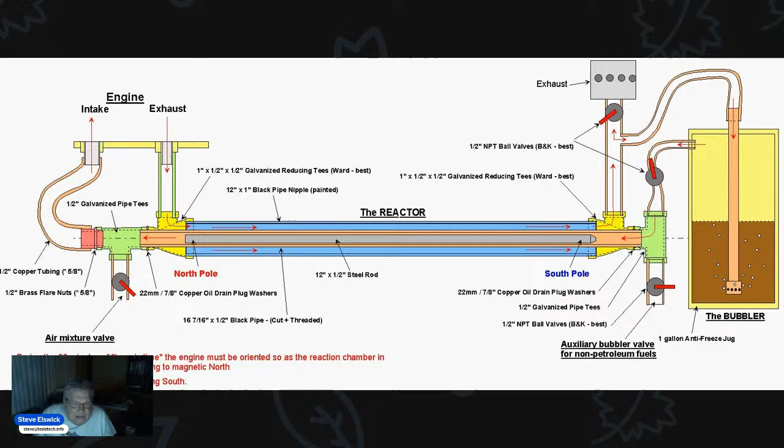Now, with this thought, let's move on to the next engine I want to discuss. This here is a GEET motor, that Paul Pantone invented. His son David is trying to continue the work. I have one of these on a small engine, and I've seen it work.

There's a couple of things to keep in mind. When this thing is running properly, the exhaust, which is on your right looking at the screen, should not get hot when it's working properly. If it's hot, there's something wrong.

When it's working, what happens is the reactor basically has the intake going through the exhaust, and the heat combined with this rod in the middle with the magnetic field turns into a plasma. The heat you see on this should peak somewhere along the axis of the reactor, and that's that blue chamber in the middle of the screen there.

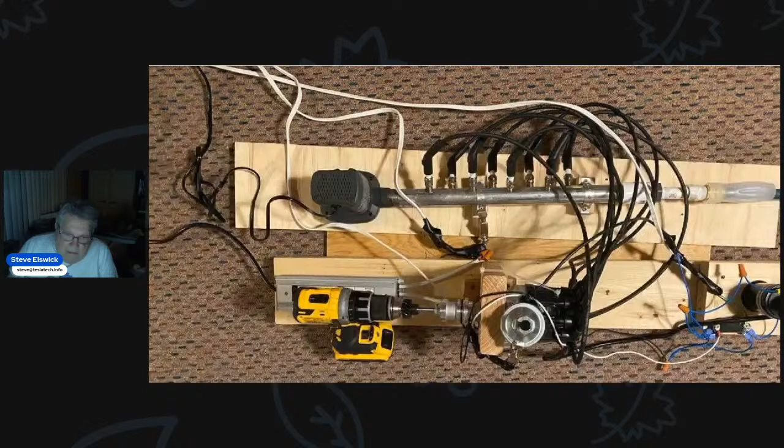A couple months ago, we had Tom Martins come in here, and he had his Martins device. To me, the Martins device was quite unique. Here's what it looks like, the schematic. On the schematic, you can see basically it has a battery charge.

It goes to the ignition coil, and then he has the air intake go through a series of spark plugs, and the air intake then goes out and is mixed with the fuel, with the fuel injection. So what you have is a plasma mixing with fuel and then getting burned. Pretty incredible stuff happening here.

I was struck by the similarities to the GEET device. The GEET device has the bubbler taking and mixing the fuel with the air, that goes into the intake, and so it has like a plasma being created out of the air-fuel mixture.

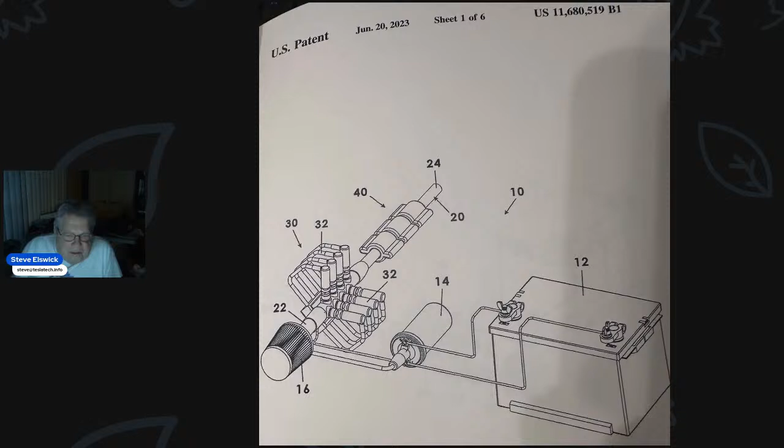And with the Martins device, it doesn't need that. It takes and turns the air into a plasma, and then when it mixes with the fuel, it could turn around and make the air-fuel mixture a plasma in itself. So it really simplifies the GEET device, I believe. That's one of the thoughts I've had.

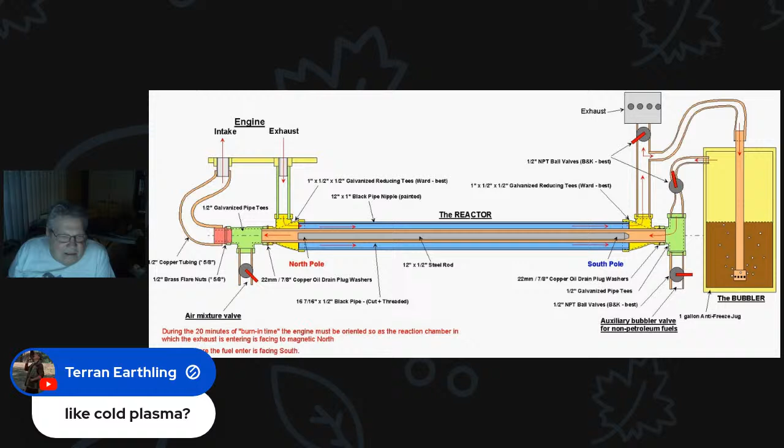I guess you could say, the thing about plasma is that back in the 1900s, they were all thinking that to be a real plasma, it had to be hot gases. This here turns plasma technology on its head.

And because everything's in a vacuum, anyone who works with chemical reactions, or actually any kind of reactions, will find that things react at lower temperatures in vacuums. It's just a fact of life.

So what will happen here is you don't have to have the intense temperatures that they're looking at in these nuclear fusion devices and that.

I'd like to see more research get done on this type of stuff. It looks like all these major companies think they have a handle on anything. So if anyone has a thought on this, this could be a place where you can have a real input in our future.

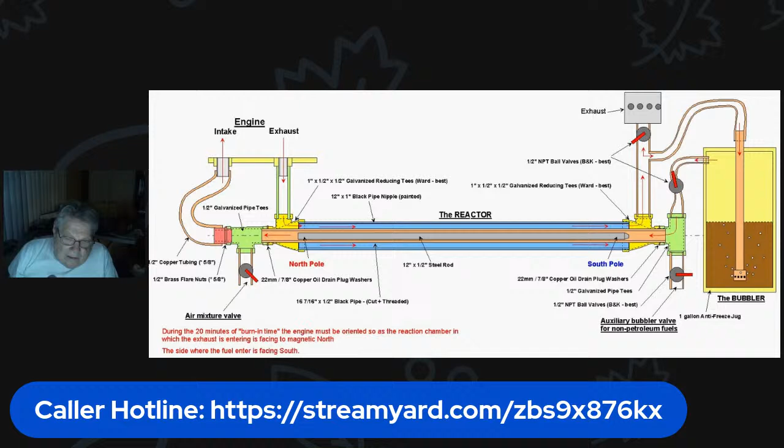And if the GEET is really complicated, I think that Martins' device here, which is patented, but I'm sure he'll be willing to collaborate with people to really build this thing up, is an alternative route to what Paul was trying to do with his GEET device. And the advantage that this device would have over the GEET device is the GEET device has a fuel line going through an exhaust, which, for safety reasons, mechanical engineers would really consider that a fire hazard.

This, on the other hand, where you're sending plasma, okay, electrified air through the system, is a totally different concept. But in both cases, you have plasma going into the combustion chamber, and it will have a different effect on the exhaust and everything.

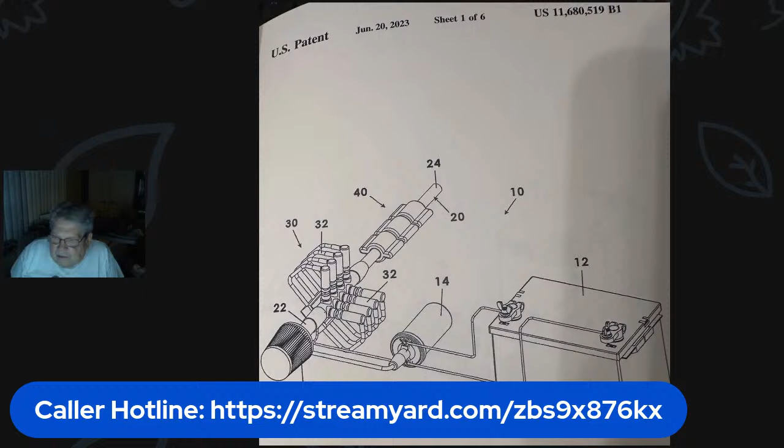Okay, and here's a question, a bit off topic: can you explain the time you disappeared the ionosphere? Well, I didn't disappear it. What happened was the United States government did. I believe it was in Operation Starfish, when they had an airburst nuclear blast in the South Pacific, and the ionosphere disappeared for a couple of hours.

And there's a group, they were based out of Goddard, but what they would do, their job was to go around, and they do things like constantly monitoring the ionosphere and the health of the ionosphere. And when that disappeared, they definitely knew something happened. They didn't know that a nuclear bomb had just gone off down in the South Pacific.

But it makes sense, because when you have a nuclear blast and you have all those charged ions going through there, it's like short-circuiting two plates of a capacitor. So that's what happened there. That was in the early 60s.

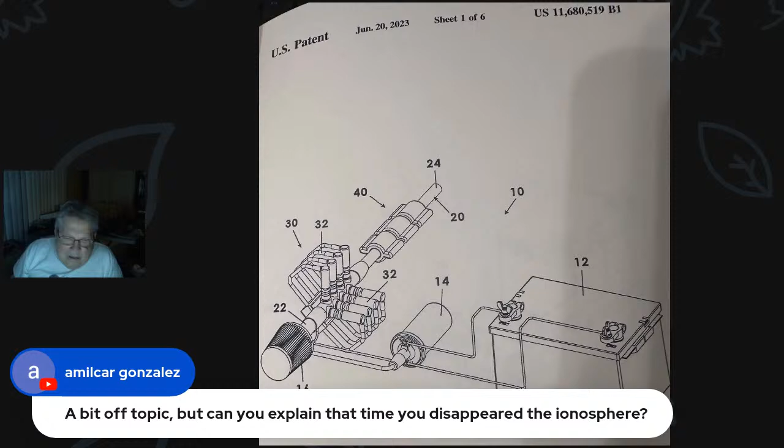And now, given the nature of the war in Ukraine, how's that working out for you? So now everybody thinks that they have to have a nuclear weapon so that they won't be attacked by other countries. And so within the next year here, expect to see the nuclear race take right back up like it never stopped.

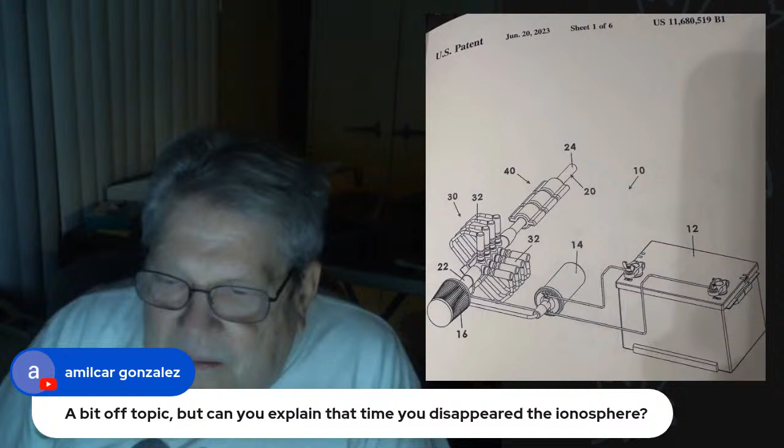Now let's see. Okay.

Another thing says that it needs to run a little rich like every ion beam combustion. I'm not sure about that. It just seems... I don't remember it like that.

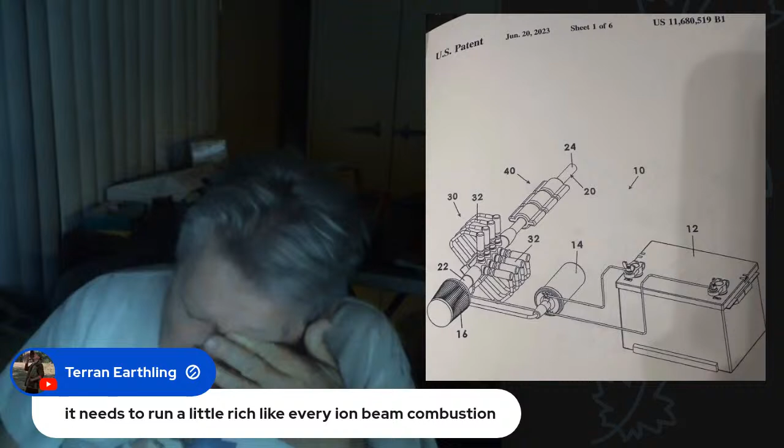I do know one thing: when we put in coffee, coffee would run great, but you had to have a little gas in there to start off. After you get it running, you don't add any gas to it. I was constantly adding coffee to it, letting the thing run down to almost nothing, then pouring more coffee into it. And eventually you get to a point where there is hardly very little gas. So that worked, you know.

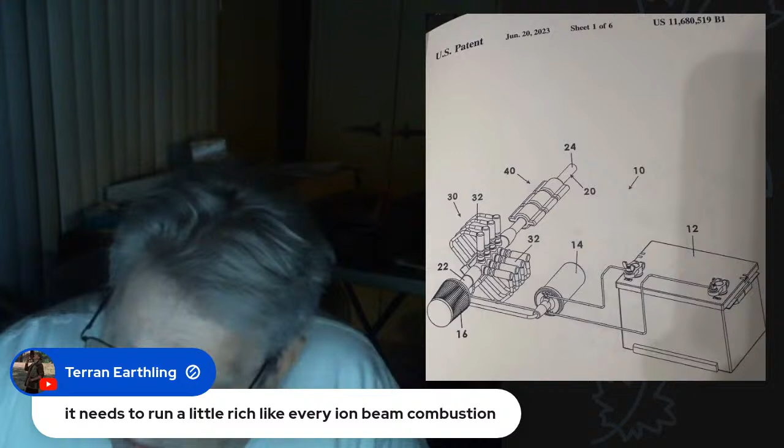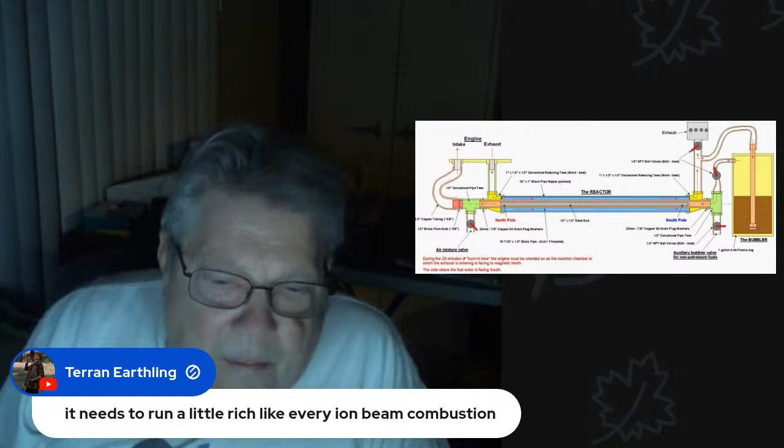Now I know when Paul was driving, I rode in his car, his Suburban, and he had converted it to the GEET device. He has a thing that kind of replaces the air intake here, this stuff on the right there, where you see the pipe with the green, where you have air coming in.

He had a thing called an air management valve, which would be on your left side where it says you have inside air and outside air. It's like a carburetor with a choke on it. I've seen some real creative people out there. I knew one guy from West Virginia who didn't have a lot of cash to work with, but he knew how to carve, and he built a wooden air management valve, which was pretty cute. But he had to constantly adjust it while driving. We were driving down the freeway between Blaine, Washington and Seattle, and anyone familiar with the area knows how hilly it is, so you're speeding up and slowing down all the time.

I also noticed there's a new motor coming to town called the Holcomb motor. I haven't had a lot of time to research it, but I went to the website, I'll put that up somewhere, just write to me. That website shows these guys are very serious. I guess they went to court because they were advertising it as an over-unity device, basically, and they won their lawsuit. It's really a big company, there are serious players in it. I haven't been able to determine exactly what they were doing because they're kind of closed-mouthed and don't give you a lot of information. Who knows, maybe we can get them to come to the conference. If anyone knows of them or is in contact with them, the Holcomb Motor people, see if you can put us in touch with them.

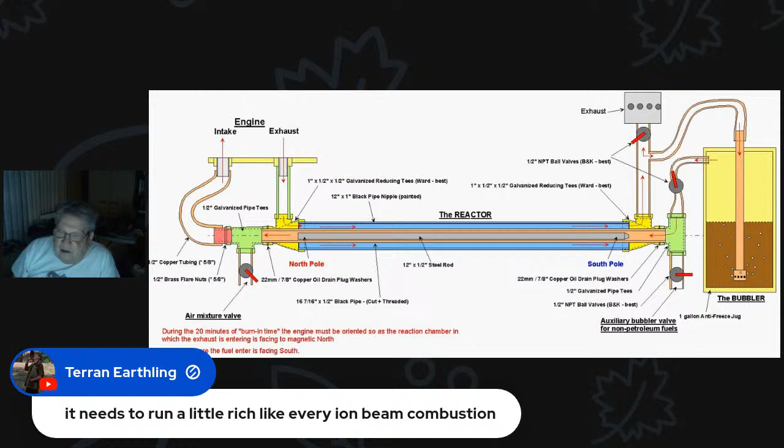It says here GEET probably rubs molecules against each other, causing electrical friction. Well, it does rub against each other, but more importantly it's rubbing across the surface of the rod, and that rubbing across the surface causes electric current to be generated, or electric charge to be generated. And wherever you have electric charge, you also have a magnetic field.

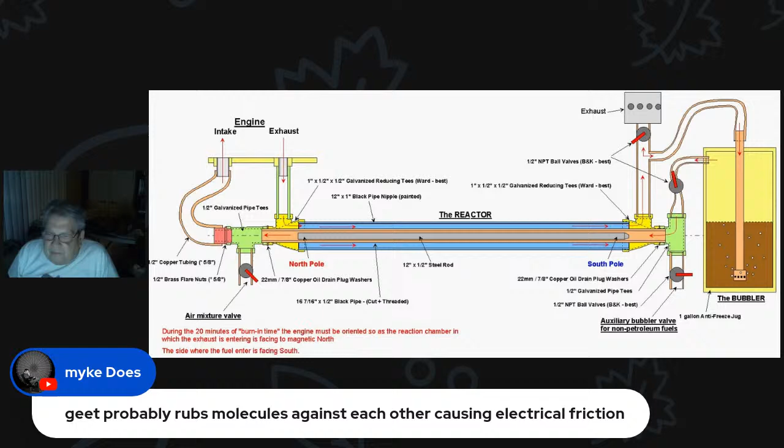And anyway, here we have one. So how is the hunt for the hotel for next year's conference going? Well, we're still working on it. I've been out for new bids, looking at what the hotels have to offer, but I'm also looking at an alternative where we can get a really nice conference center at a decent rate. And then we could also go to a lower cost hotel, where instead of like $120, $140, $180 a night, if we could spend a lot less, more like down in the 80s and 90s with breakfast included, that's one of the things I'm looking at.

We did this in Salt Lake City, and everybody had a great time, and we were able to get a lot of information out. I catered the food myself, and we had lots of chicken, pizzas, and subs, so nobody lost anything, they just had a great time. We just had to go from the facility to the hotel, which was just down the street. That's something I'm trying to do here possibly, at least look into it and go back to the hotels to see what kind of prices they're willing to entertain. My biggest issue is...

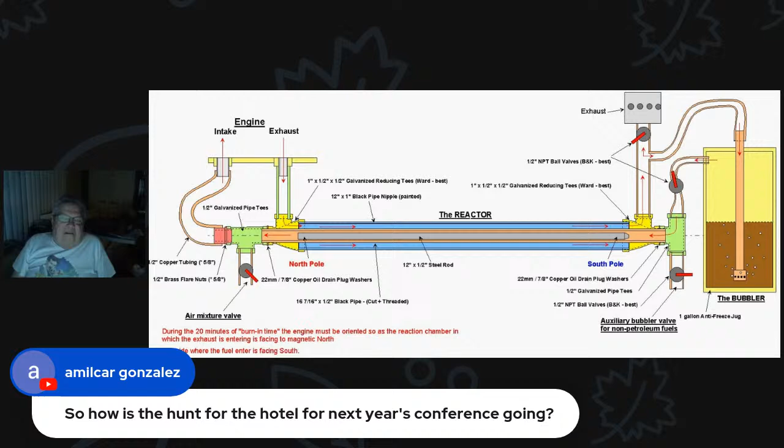I don't need to be lectured on boundaries. One of the hotels said, well, we need to set boundaries. I'm going, well, we don't need any boundaries, you should be talking about how to make our conference the most successful ever, not trying to have boundaries. I mean, that's not what it's all about. Somehow they forgot that we're customers and not children. Anyway...

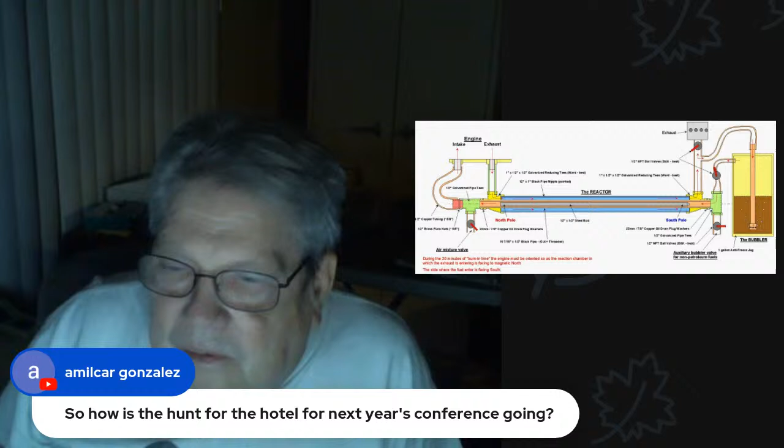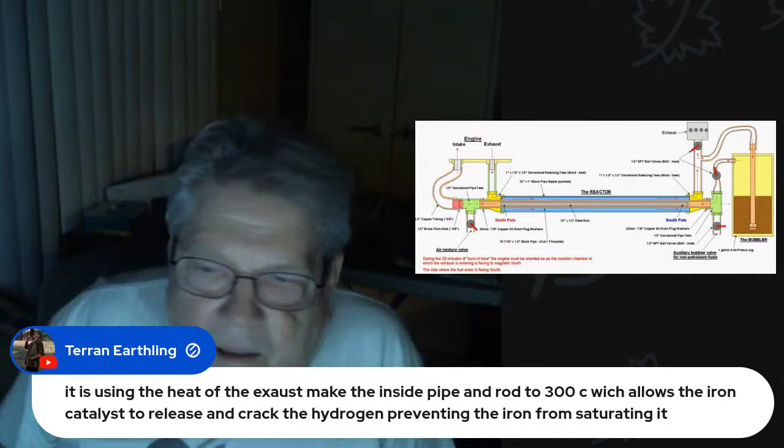They're talking about the airflows on the GEET engine again here. The thing about the engine is you have a pipe inside of a pipe. And here he says it's using the heat of the exhaust to make the inside pipe and rod reach 300 C, which allows the iron catalyst to release and crack the hydrogen, preventing the iron from saturating.

Well, possibly, but I do know that it does create the plasma, and at a certain point along the reactor there you're going to have a hot spot. It's like a rag, like when you squeeze a towel and squeeze all the water out of it. That's kind of what it does in this reactor, and the energy is absorbed into creating a plasma out of a non-plasma material.

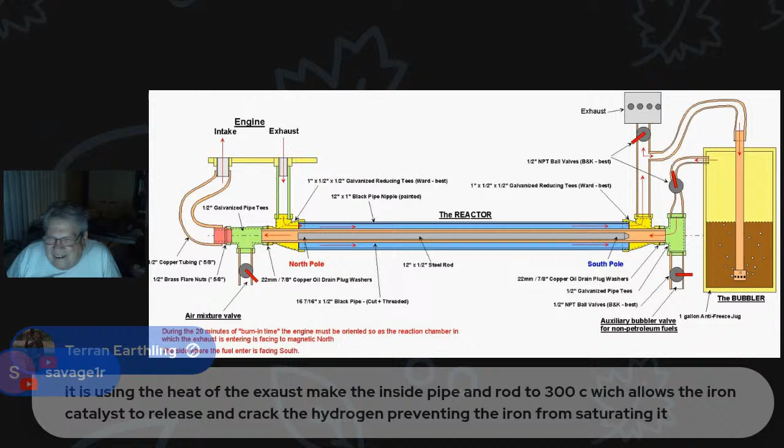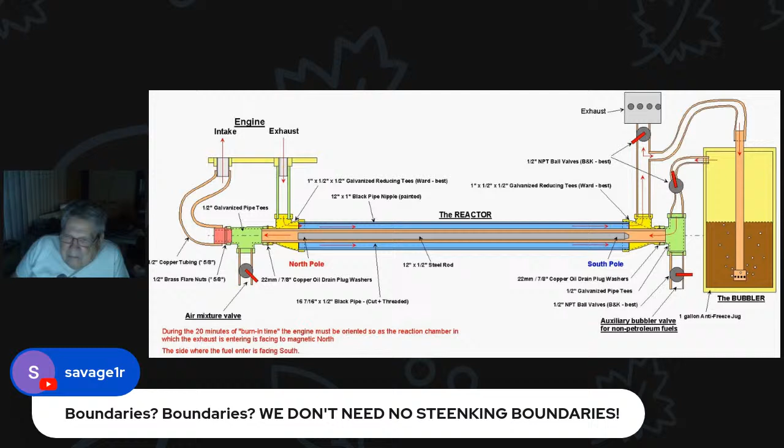See, I try to explain to these people, we're out here to break the laws of physics, or rewrite them, but the boundaries is the anathema to what we're all about. And basically they just don't like us moving tables around and stuff.

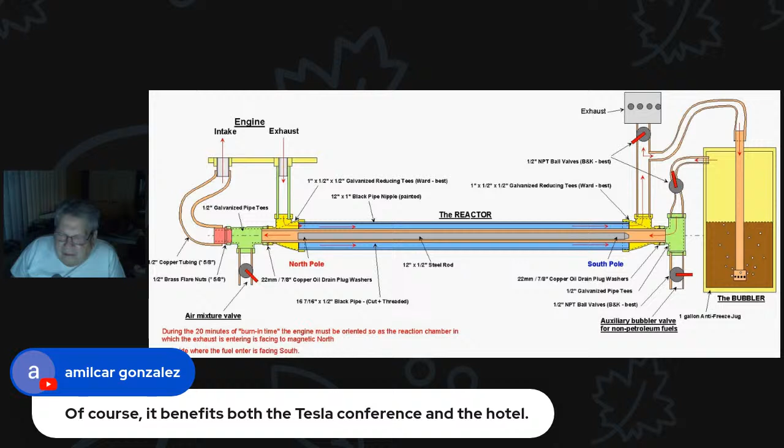That's one of the reasons we don't have it in Vegas. In Vegas you have certain rules you got to follow, and plus it's very expensive at most hotels, especially on the Strip. This town has become all about money. I remember just a couple years ago, about 3 or 4 years ago, you could get a hotel room for $28. And now they tore down four major hotels to keep the room rates over $200 a night. This is insanity that we live in today. It's all about the money, all about the Benjamin.

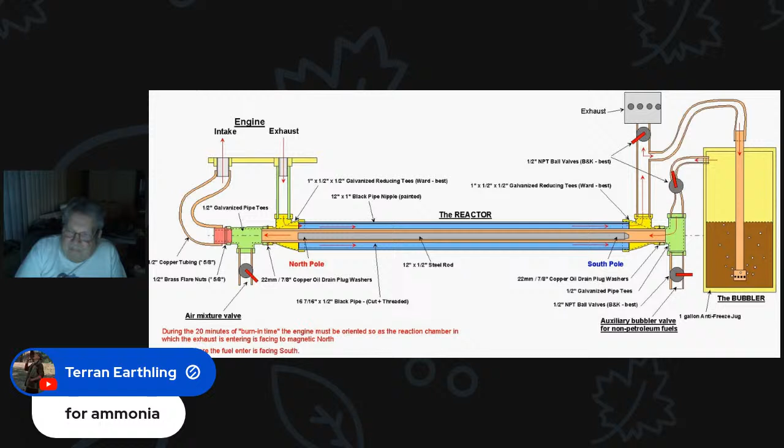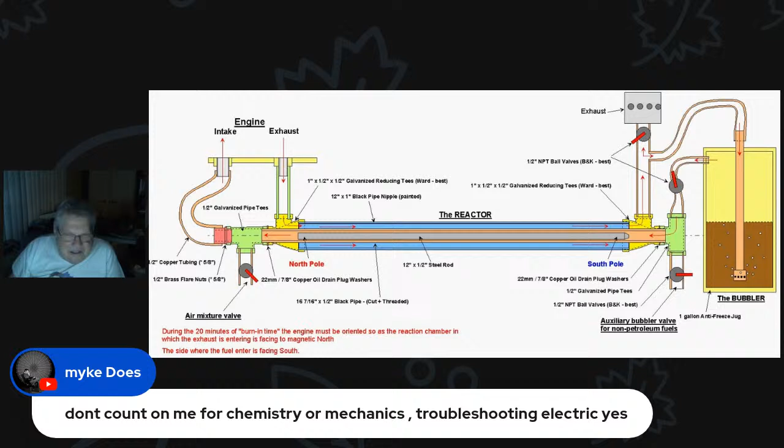Okay. Anyway, we have Myke here. Don't count on me for chemistry or mechanics. Troubleshooting electric? Yes, okay good. My chem is halfway below average and my mechanics is worse.

Well, I know next week we'll probably have Bernard here, and he could probably address some of the stuff we're talking about now. I know he's big into alchemy, which is converting different forms of energy. I don't know if anyone of you was watching last week, but he had a jar of light blue liquid.

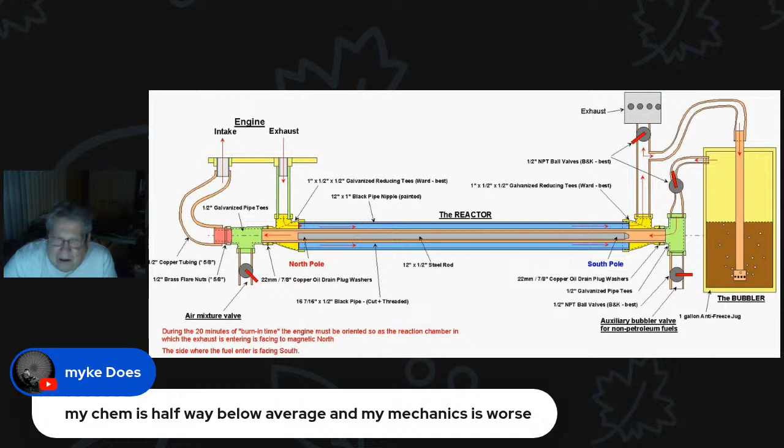That really struck a tone with me, because I have some friends, and one of the things they're doing is they're taking all this waste ore—or not ore, but the stuff you get from when you're processing ore, slag—and they're taking the slag, crushing it to a certain very specific grain size.

They're cooking it in water for about a week, and adding catalyst to the stuff when they mix the pot together, and they keep it at a certain temperature, with no electricity applied to this thing whatsoever. But if you open the lid, you see like a lightning storm inside their cooker, and that's the free electrons snapping back into orbit, their proper orbit. Because slag is corrupted metal.

And what this process does is decorrupt it. When they do their RF analysis on it, first it comes out zero. But once they go through the process, they have an incredibly rich product there. And the important thing to know is that it was like a light blue.

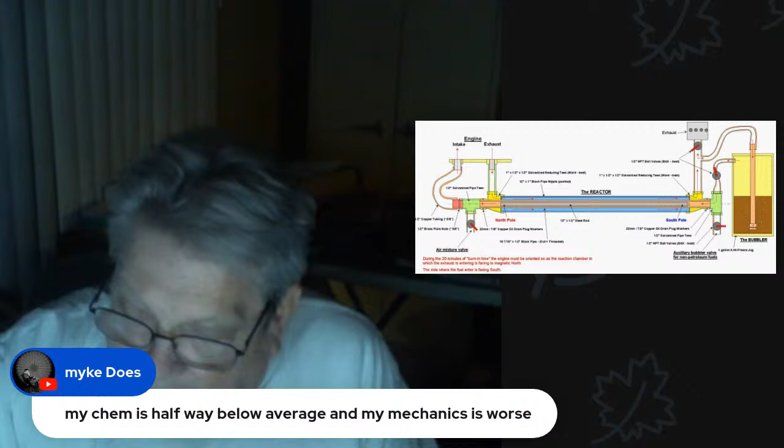I guess it depends on the blue liquid. But then you take that solid particle that dropped out of it, and you can form what they call a button. You take the button, and that's what gets assayed, using an RF assay. Because they use the same type of assay, you know it's apples to apples, not apples to oranges.

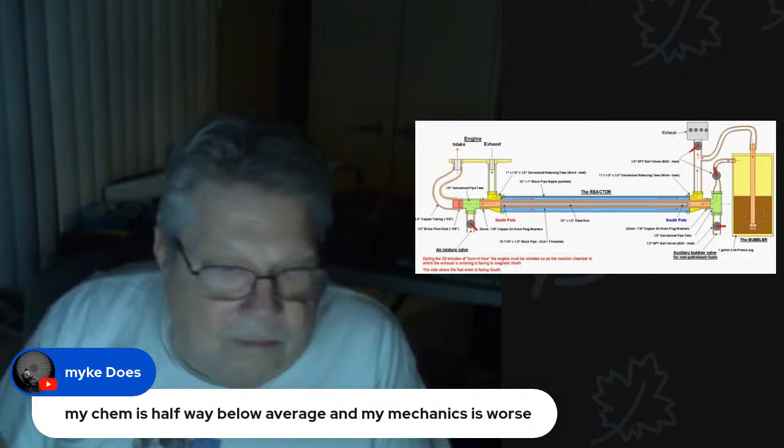Yes sir, hi. Yeah, I showed you guys last time I was working on my dual axle Tesla turbine, and I have a little bit of an update if anybody's interested.

Okay, so how's your turbine coming? Well, it's been going through a couple different iterations. I've been working pretty closely with Jeremiah, and he's been kind of guiding the design of the whole thing, helping me understand the nozzle and exhaust, the shape of everything, the proper dimensions and whatnot. So things have been evolving quite a bit.

This is actually the second iteration here. If you can see that, this is just the housing, the nozzle, and the exhaust. And that's evolved into something a little bit bigger. So this is the newest one.

What it's going to come down to when I'm done designing is there's going to be 1, 2, 3, 4, 5 parts that will need to be printed. The inlet and the exhaust are actually the same thing interior-wise, as well as the caps. You can take the cap off and turn it around if you want to put the air in one way or the other. Same thing with the bottom.

So right now we're just working on getting some... what the heck does he have me get. Sorry, go ahead. So what are you using to drive this thing?